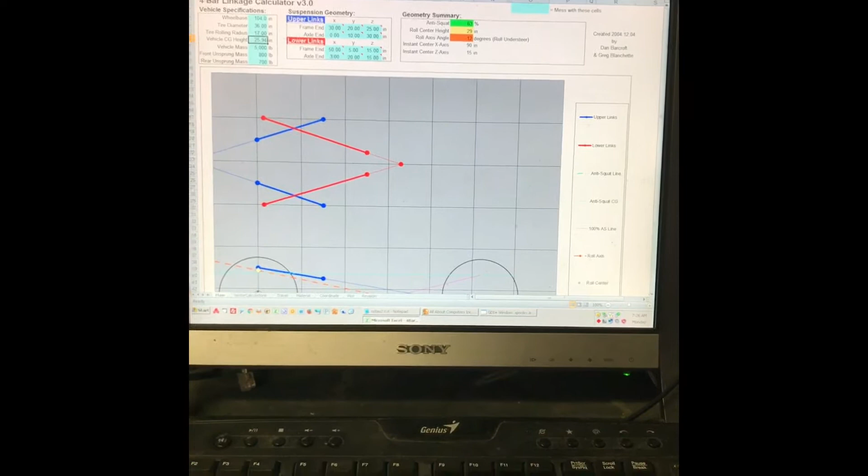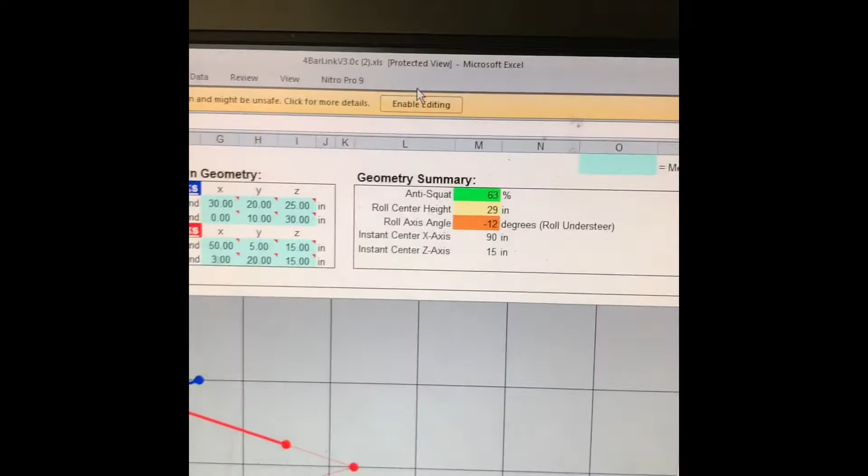First thing you want to do is open it up with at least Excel 2007 or newer. Come up here to where it says enable editing and click that. What that does is turn on the macros inside the Excel file so you can customize this stuff. So this is close to what we're doing.

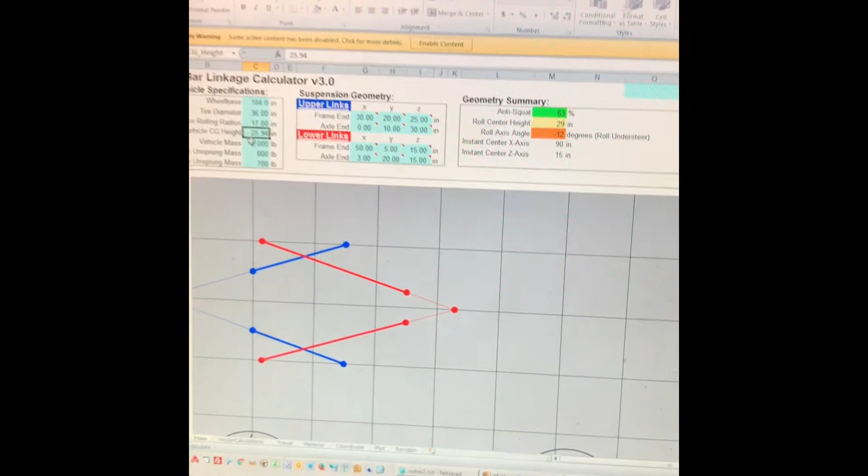The numbers are a little off, so I'm going to go through this with you. These light blue fields are the ones that are editable, that you can put your numbers in. This is going to help you out here.

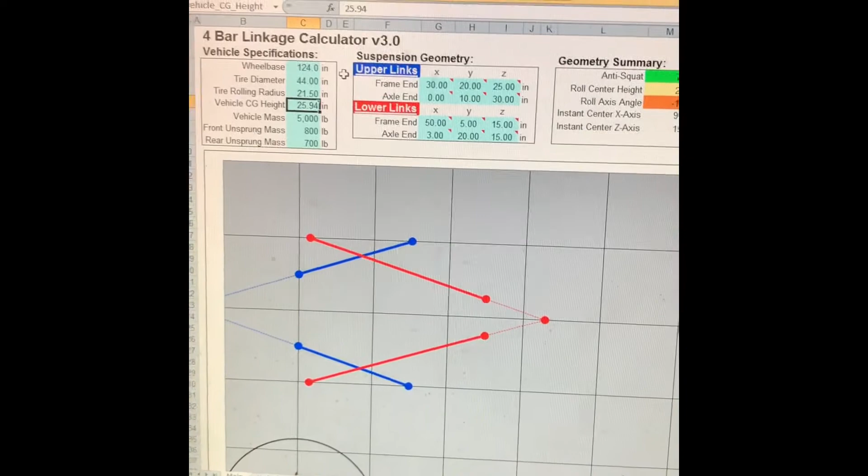So we are shooting for about 124 wheelbase. Our tires currently are about 44 inch. The rolling radius makes that about 21.5, you don't get quite 22 inches. Our center of gravity height is actually much higher than that, it's about 47 if I recall. Our mass is going to be nearly 6,000.

And we're going to incline this just a little bit to overshoot it, we're going to go 800 on that. And your unsprung mass, that's kind of like your axle weight with all the gear on it. So that's a start, this gives us an idea.

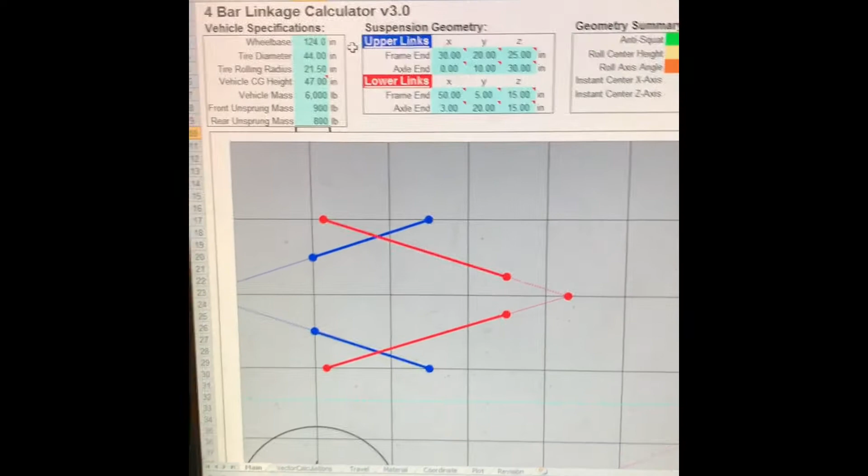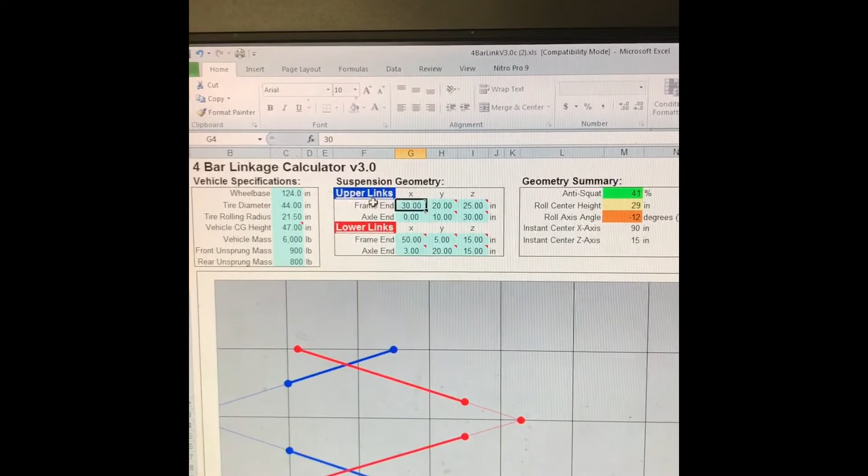So first thing we're going to do, I'm going to do this from memory here. If I remember right, what they're asking for is the frame end of your upper link, shown here in these blue bars. The first one, if you hover your mouse over it, says forward from rear axle center line.

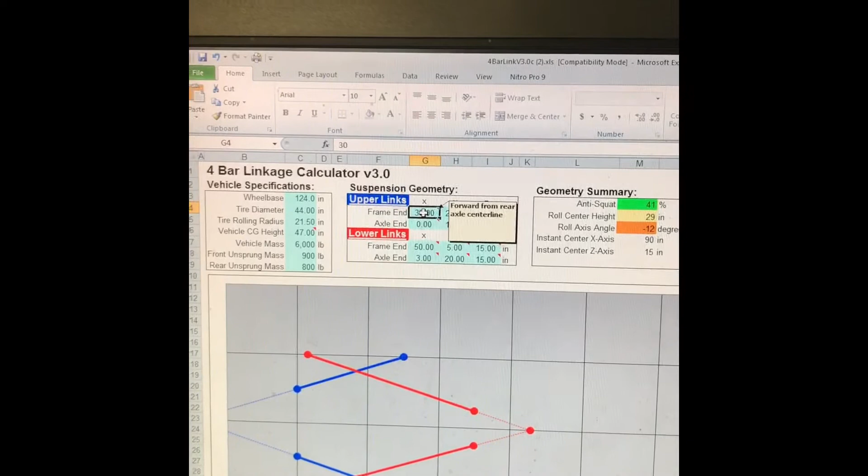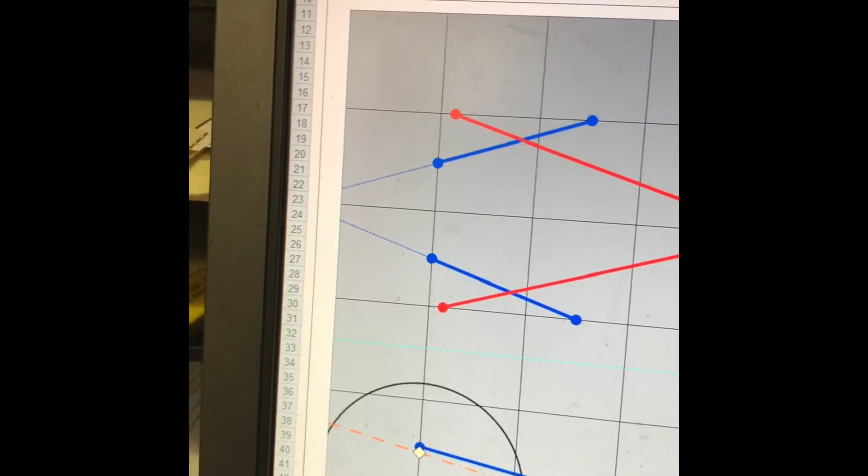So what this means is if this line here was the center of your axle - let me scroll down here, too far - you can see it kind of locates things for you virtually here. So that's showing 0 to the center of the axle. And your overall length, you would think would be the total length of your bar, but it's actually where it ends up straight on from the axle center line.

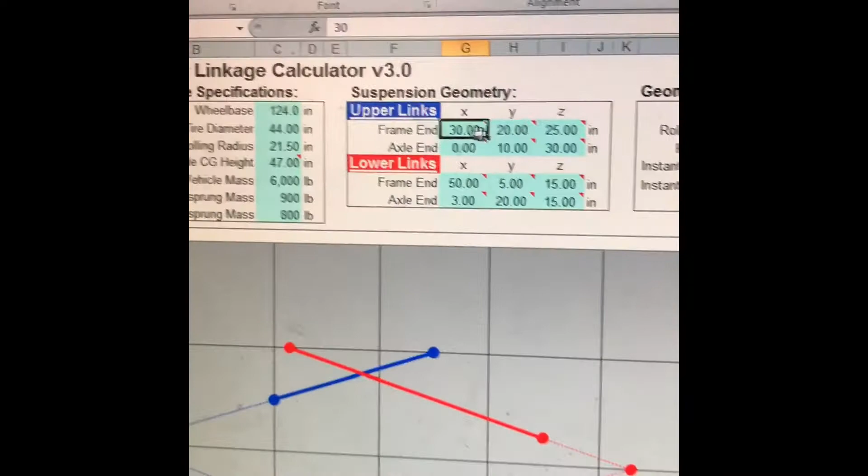So come up to the top here, where it says frame end, forward from rear axle center line. If I remember right, I'm like 54.5 is where we'll start. I actually have a picture of our actual numbers, so I can put those in. This is an old copy.

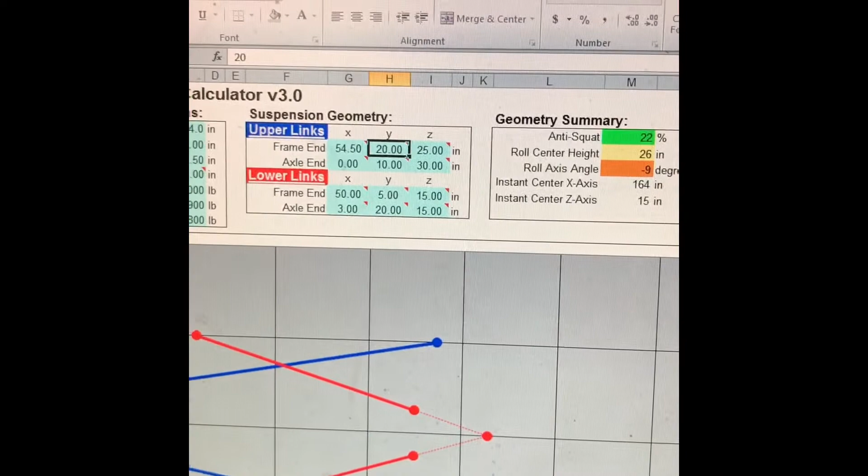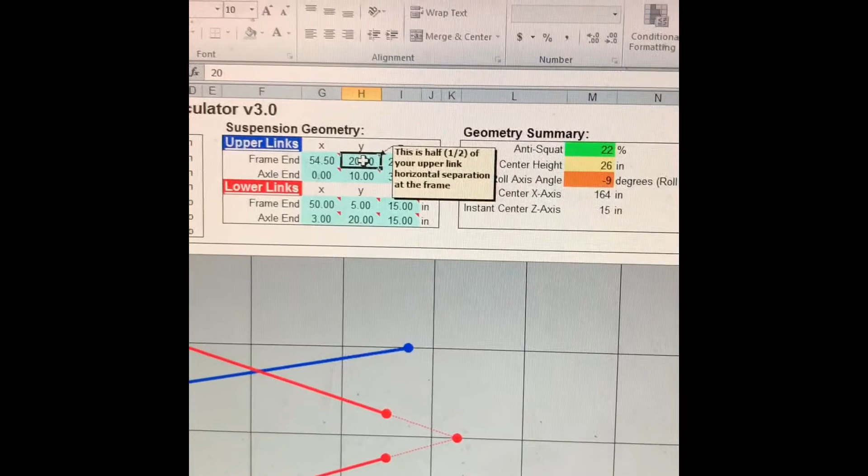Here it's going to ask for, I believe this is our separation, half of your upper link horizontal separation at the frame. So that's talking about these numbers here. What you're going to do is measure this complete width, divide it by 2, and that'll give you your deal here, that's half of your upper, obviously. I believe we're like 54.5 or something like that. We're going to just put some virtual numbers in here to try it out, just to give you guys an idea on how this functions.

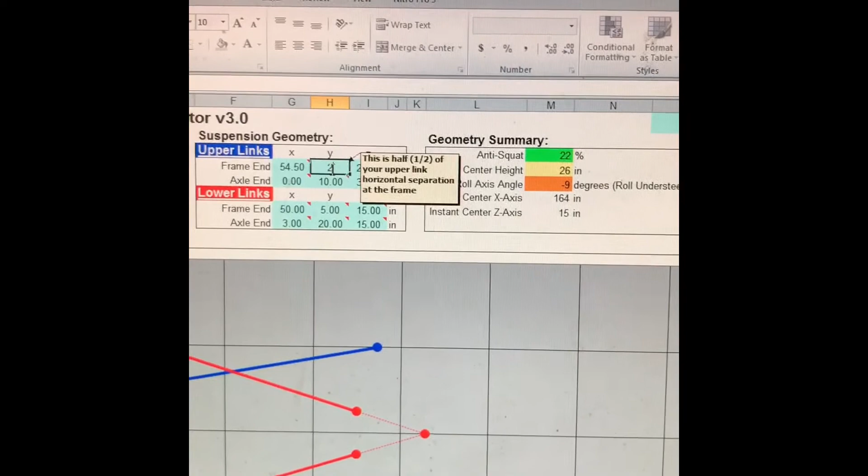So let me think here. 54.5, that was 25.25, if I remember right, is where - whoa! There we go, had an extra dot in there.

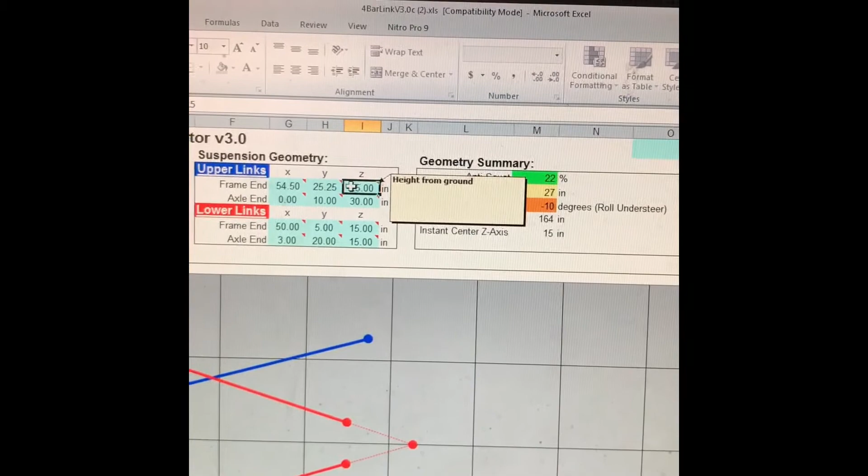Height from ground, we were at 33 inch at full bump. We're going to build this at full bump first, and then I'll add the inch in to the height from ground on the frame end on these values here.

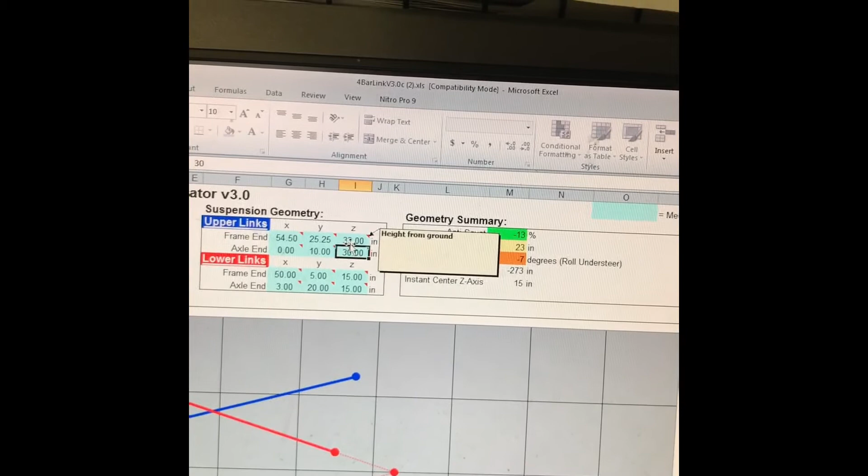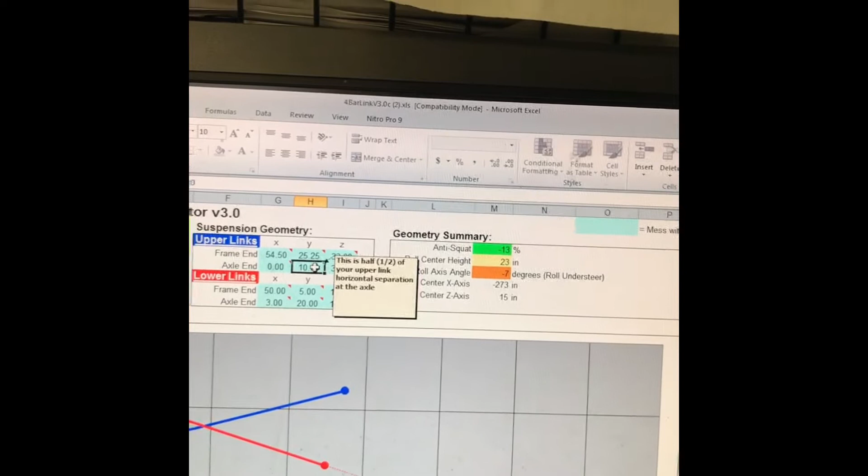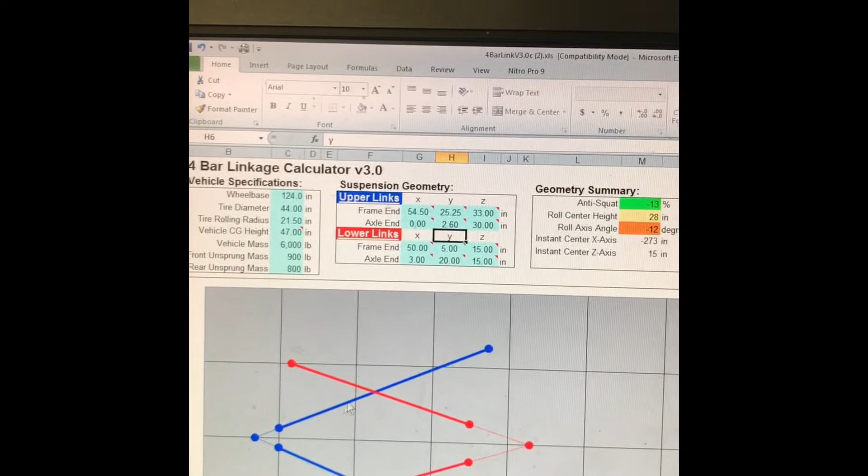So next, again, it's center, so don't worry about this. This is our upper horizontal separation at the axle. Ours is 5 1/4 - or no, I'm sorry, it's 5 1/2. So it's, I remember, 2.6 is what this number value is. So this gives us close here. This gets us a separation of more than 50 degrees, if I recall.

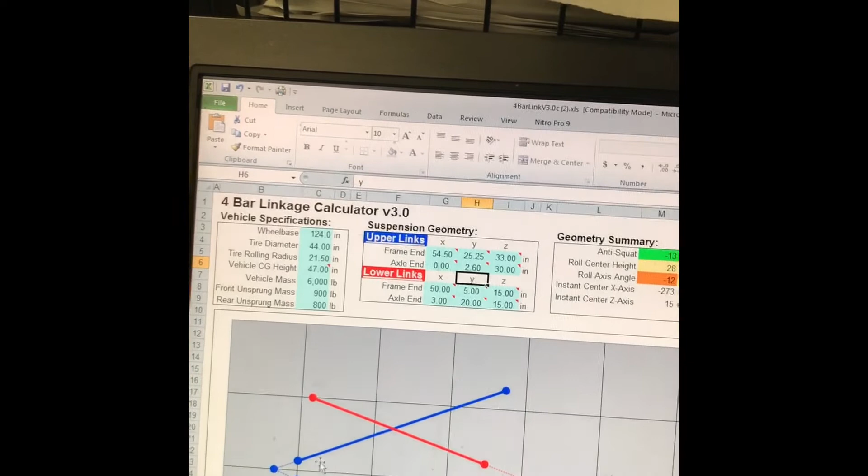How we figured that out - you want at least 45 degree separation here at your top. You want to make sure that these bars, that's what centers your axle and keeps the side motion, so you don't have any side motion to have this axle go back and forth. So that's a start, okay, so we got that pretty close there.

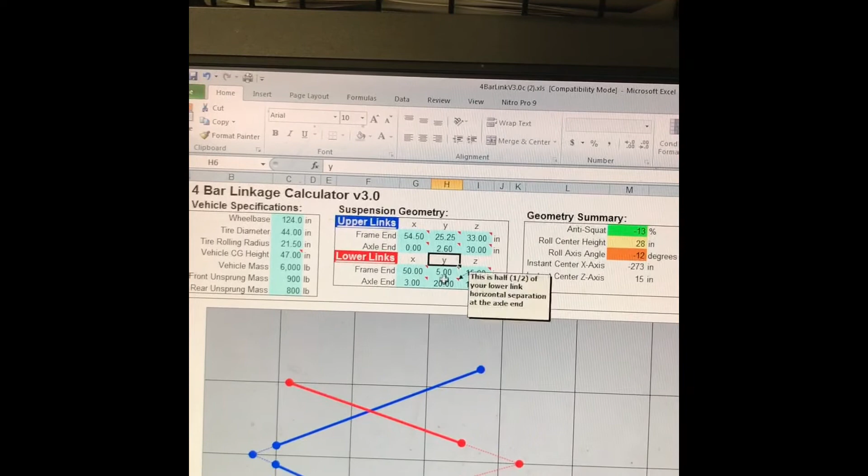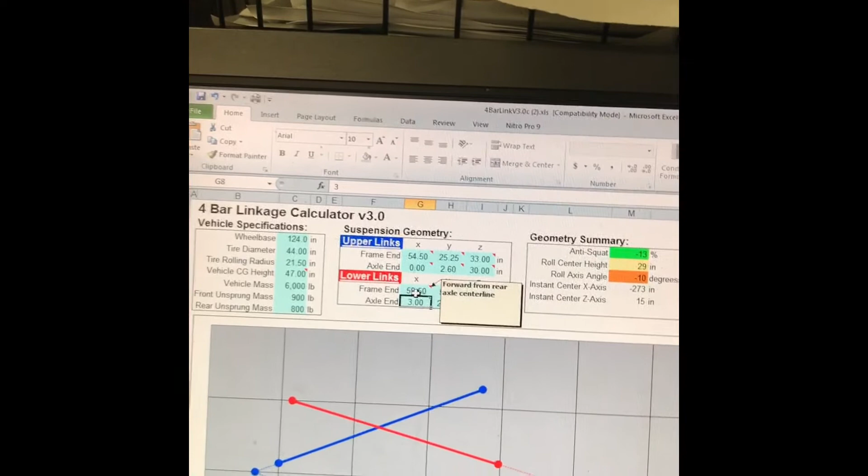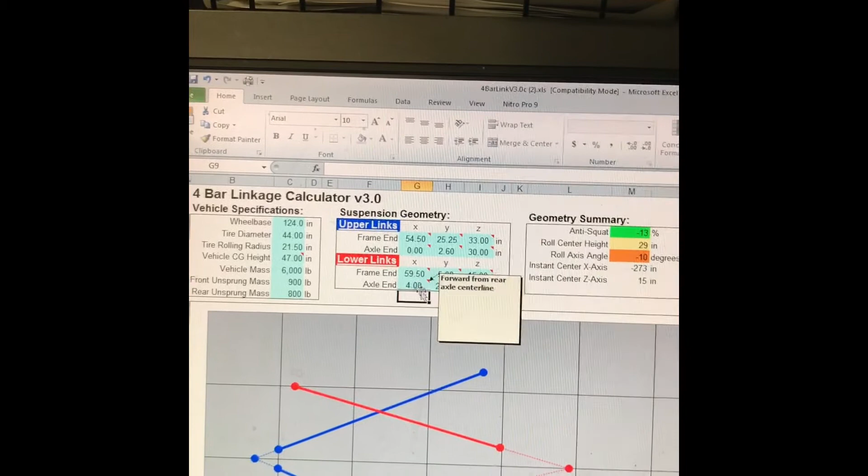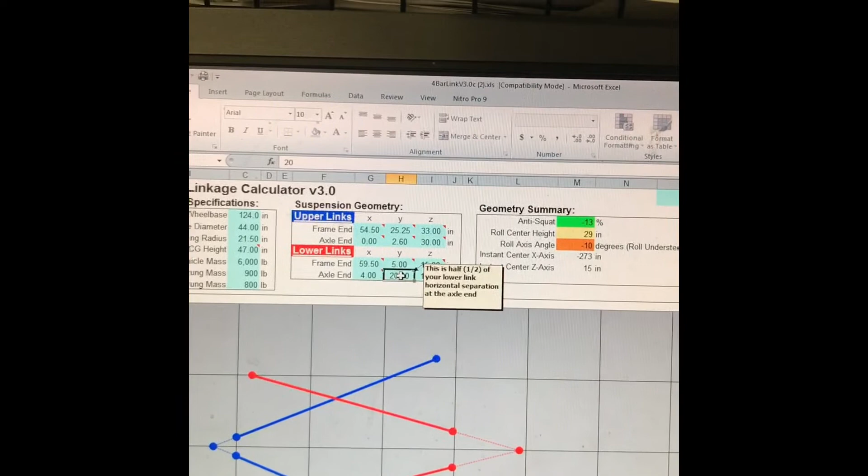So I'm just pretty much rebuilding this right from scratch, and you could do this from raw numbers again. So here's your half of your lower link separation horizontal at the axle end. So we have a total of 48, there should be about 24 if I recall.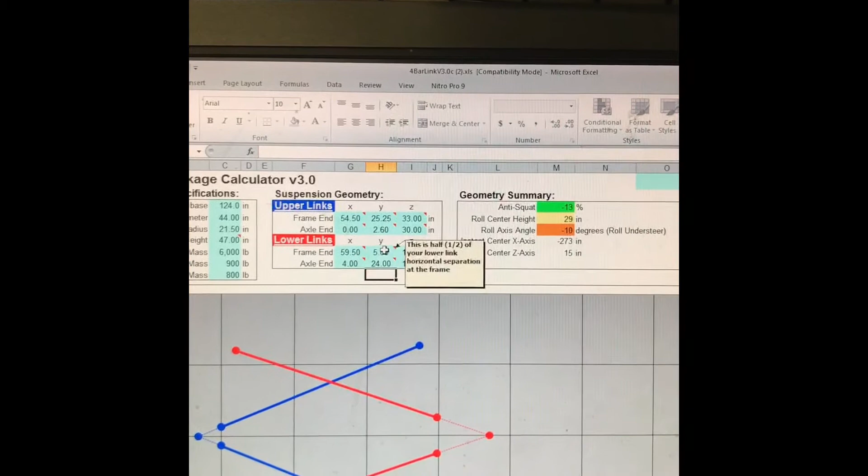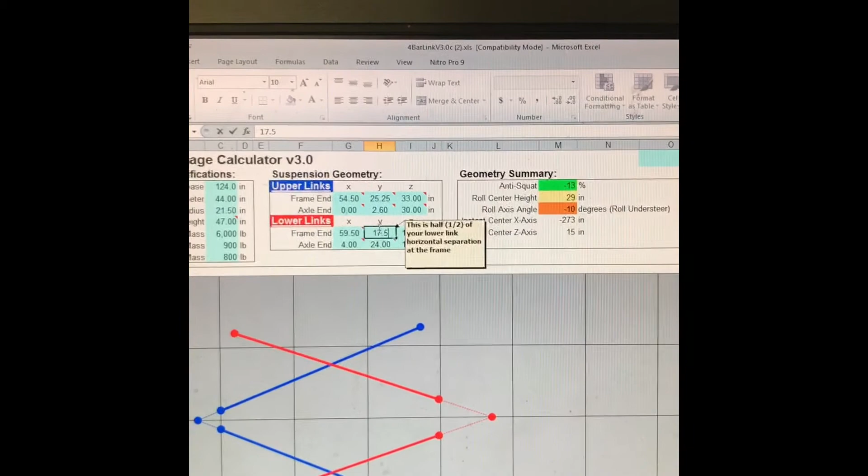Okay, and then down here, this is way off. This should be at the frame. We have that at about 34, so half of that is what? We'll go 17.5 just to be close. That's too much, it's going to be more like about 15. That looks realistic about what we have set up now.

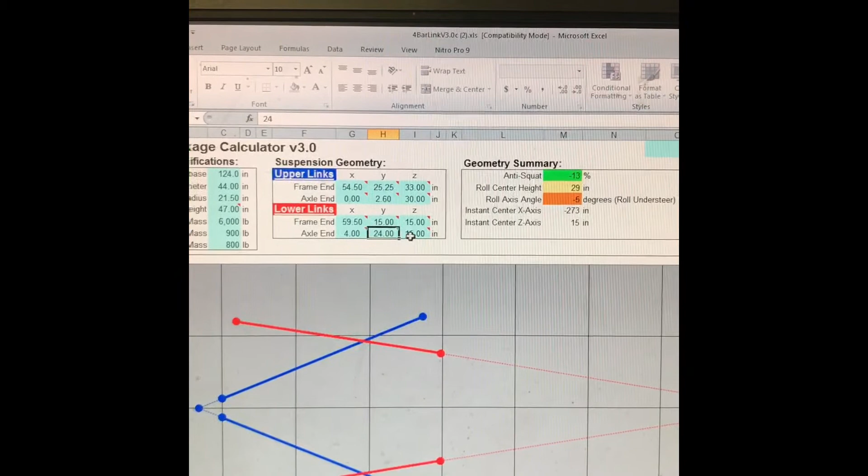So here we got some other numbers. This is height from ground on the frame end, which is obviously not 15 inches.

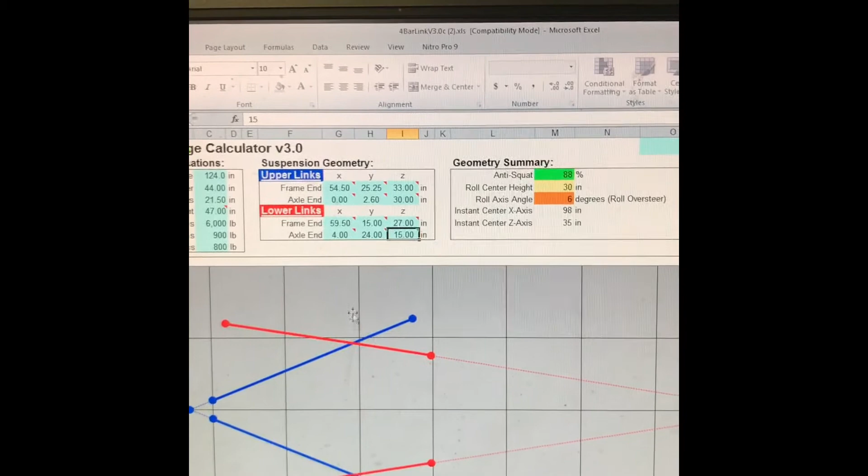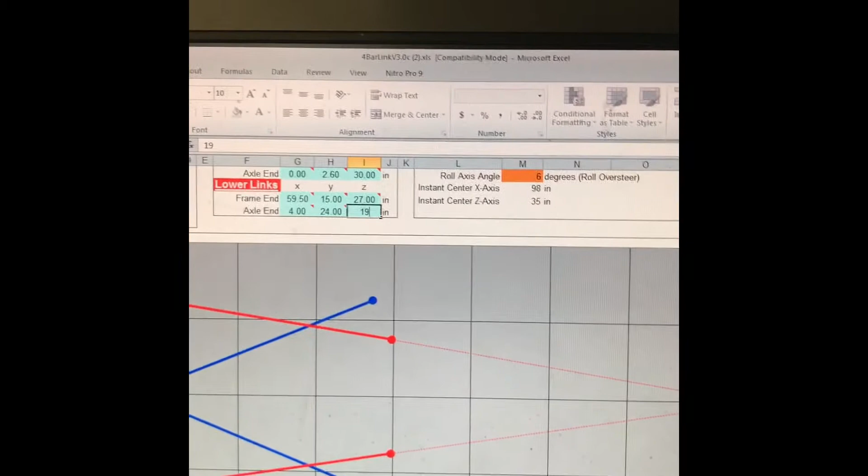Lower links are from the ground on the frame end were 27 inches. And on the axle end, they are, if I remember right, gosh, this one's a tough one, guys. Yeah, see how low that is? That is not correct. This should be up higher. If I remember right, it's 19. Pretty sure it's 19. See, that looks about right where our setup is now. That's really close to our double triangulated 4-link there.

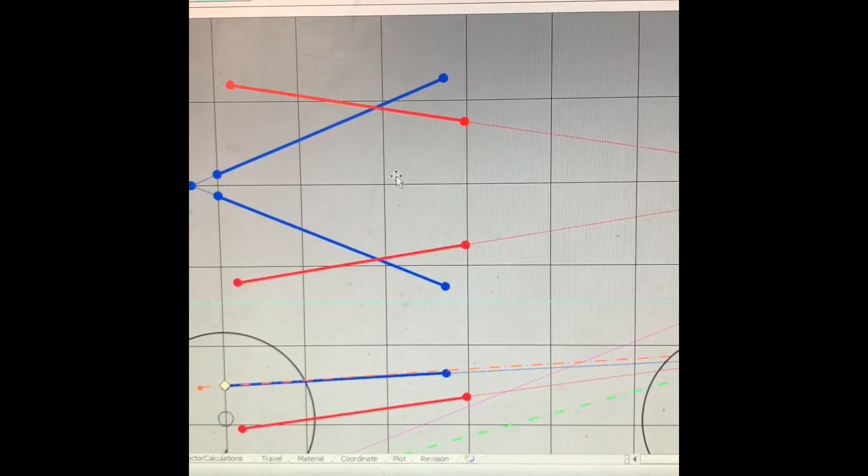Let me see if I have all of the numbers inputted here. Give me just a sec. Okay, now if you go down here to where it says travel, you'll get this tab down here. We're on the main tab, and now we go 2 over to travel. There's some stuff in here that you can do as well, and you would think 10 inches is what you'd want to see, but it's actually -6 will give you a 6-inch ride height.

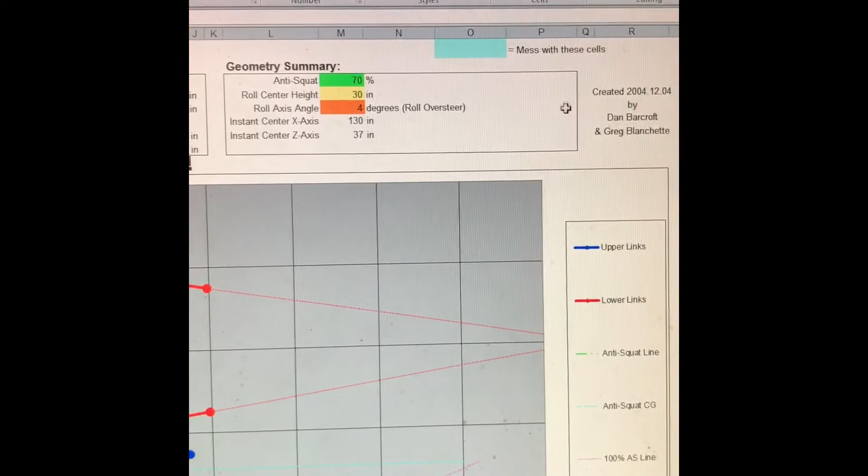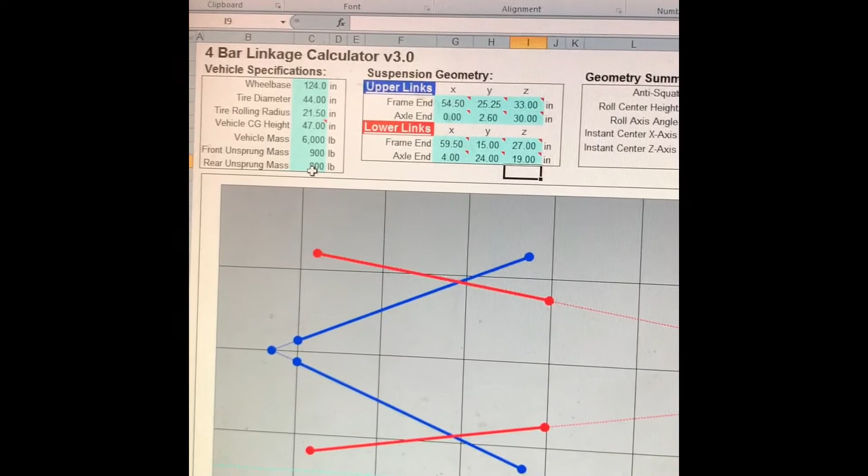And now if we go back to main, this should give us some different numbers. For some reason these aren't coming up. I might have a different version of this. I need to grab the other one, but this gives you a rough idea, guys. Play with these light blue fields, and if you're unsure on something like this vehicle center of gravity height, typically, if you are an iron block, it's your highest bolt on your transmission bell housing.

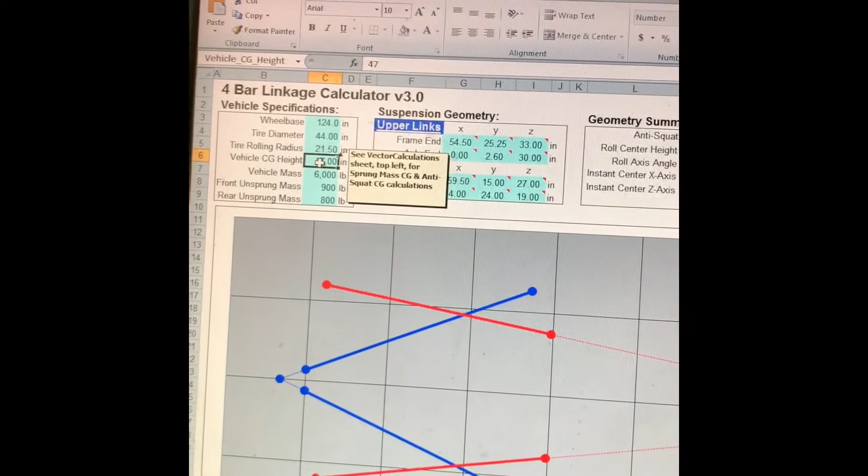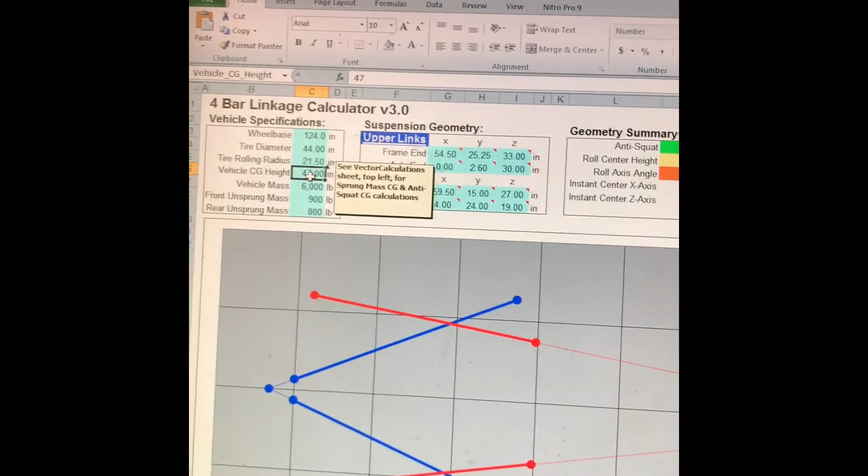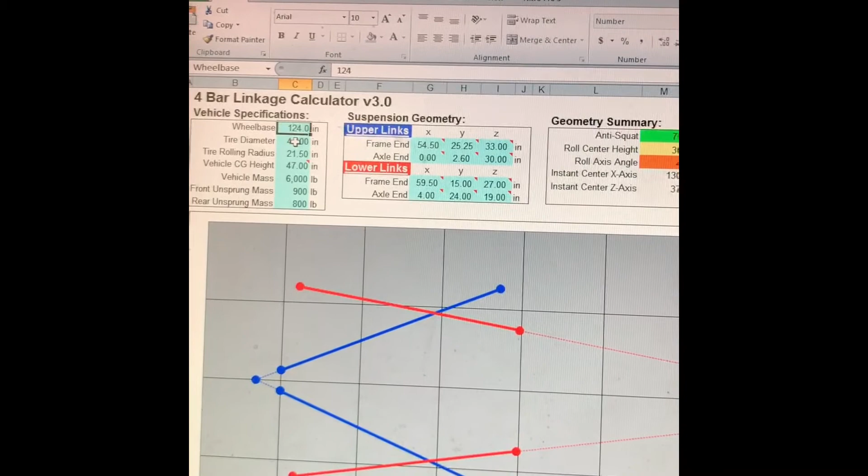If you're an aluminum guy that has a really light motor, an LS or something like that, they say the center of gravity height is about halfway up the transmission on the bell housing. So a couple holes down, you gain 2 or 3 inches because of how light it is. Mass, obviously, that's the total weight of the vehicle. Your wheelbase measured, hub to hub. We wanted to go a little bit smaller, but this rig is going to be doing multiple things: hill climbs, rock bouncing, mud bogs, go out to the sand and play, climb on the rocks. We've got multiple transmissions, all sorts of stuff for it.

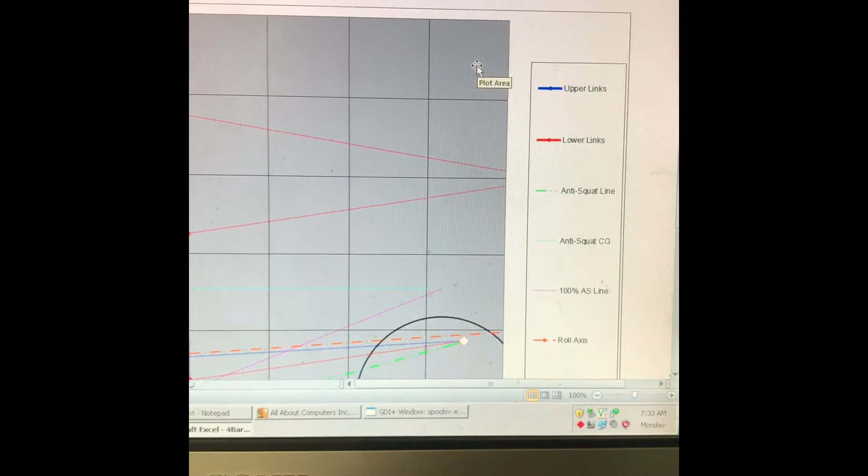So I think we're close on these numbers. Everything looks pretty dang close. That's about what our deal looks like. And for some reason, this version doesn't have the travel. So let me get back to you. We'll post this up here, and make sure that when you're done, what I like to do is keep the original. So make sure you go to Save As, and throw this somewhere where you get a second copy, like step 1, step 2, step 3, whatever works for you. That way you can go back and look at your changes, and get real familiarized with the characteristics of your suspension.

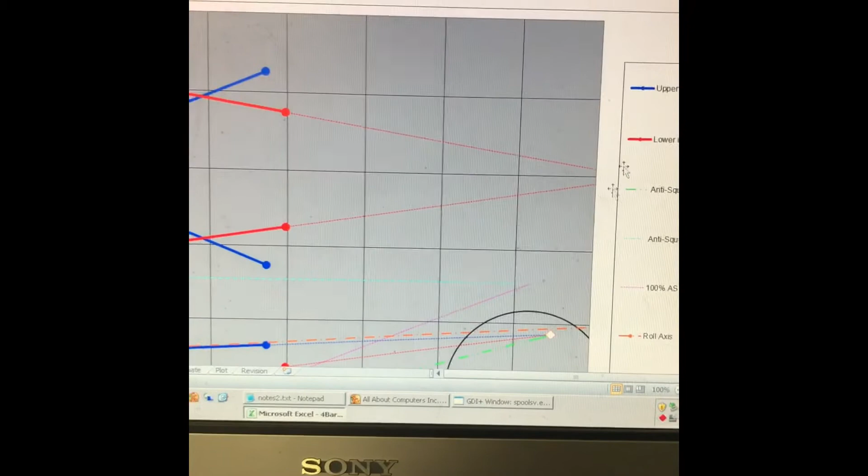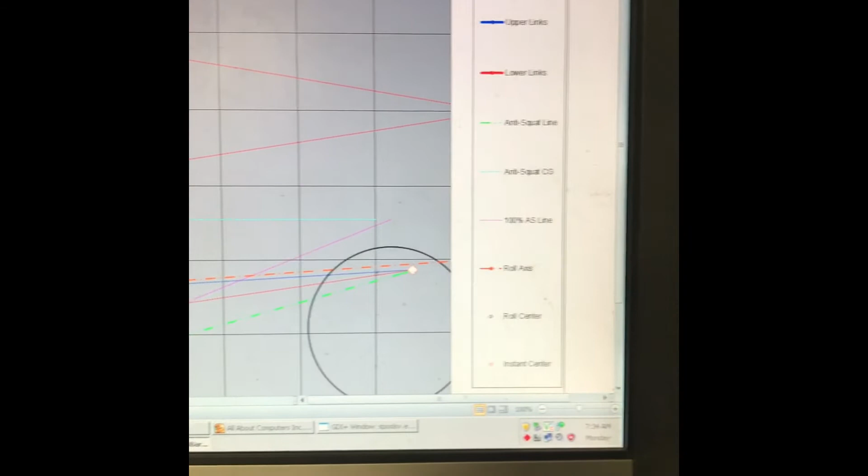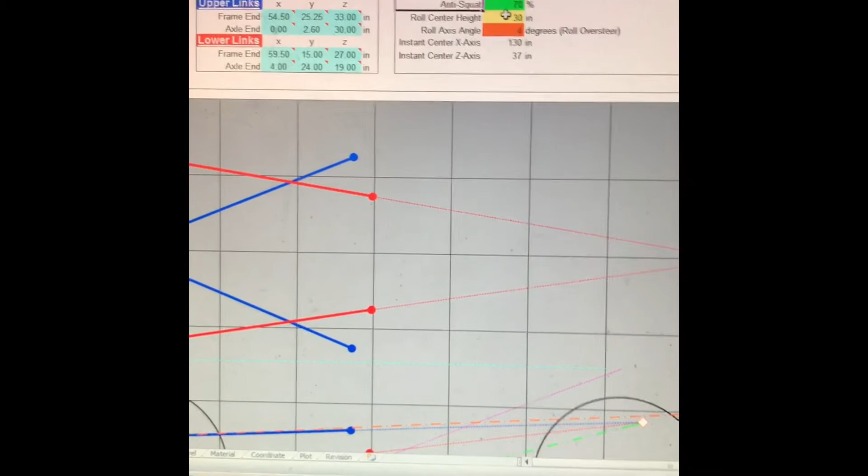Again, the biggest thing that you really want to do is make sure your uppers, that's signified in this blue bar, it goes to the frame end. Make sure your frame end's got some adjustability, because this is what's going to give you a good anti-dive number or anti-squat, depending on what you're working on. This calculator, from what I've read and from the videos on rock rods on YouTube, they state that anti-dive is for the front and anti-squat is for the rear. So this value is actually the same for the front. And in the front, obviously, you want a lot of anti-dive, because you don't want that nose to dive down when you step on the pedal.

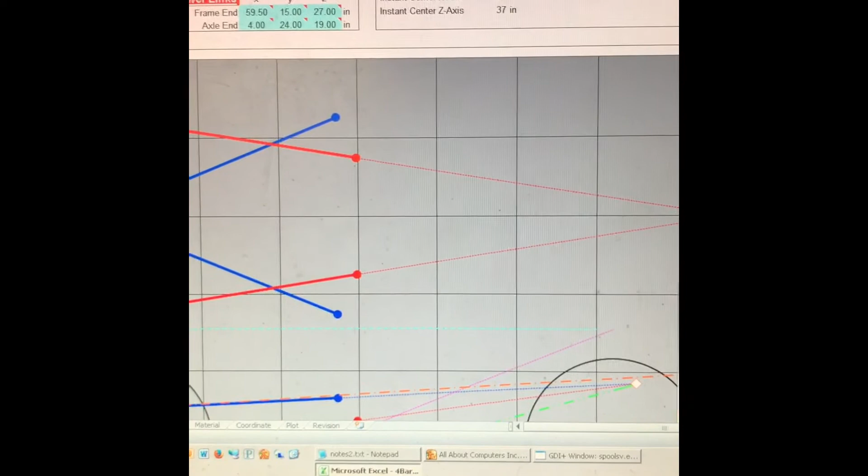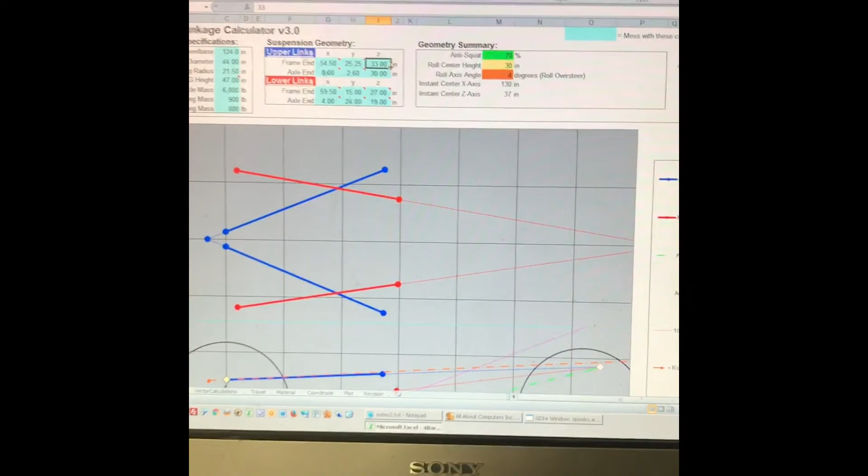So the optimal range, I believe, is between 90 and 110. 100% is about right in the middle, from what I understand. So we've actually been able to adjust ours. If I go lower here, you'll actually see that value increase. We've got 4-link adjustments on the upper frame side. So what I'm going to do is lower this. And instantly went from 75 to 91% anti-squat. So this is going to help you guys understand a little better what you're doing here.

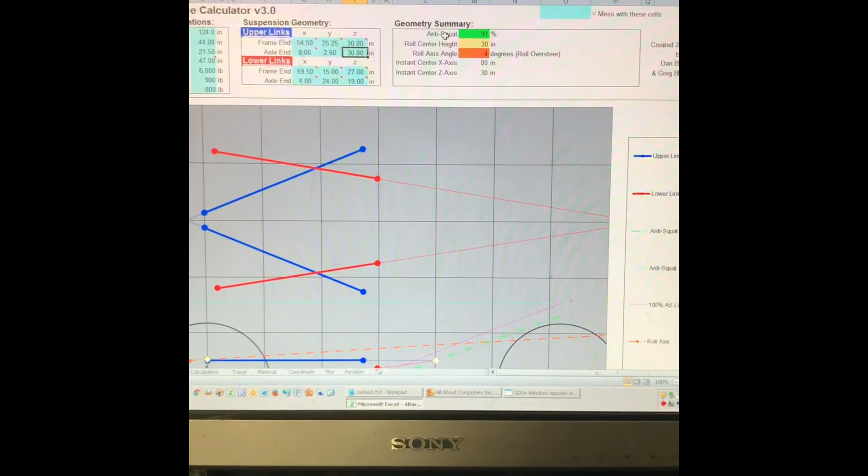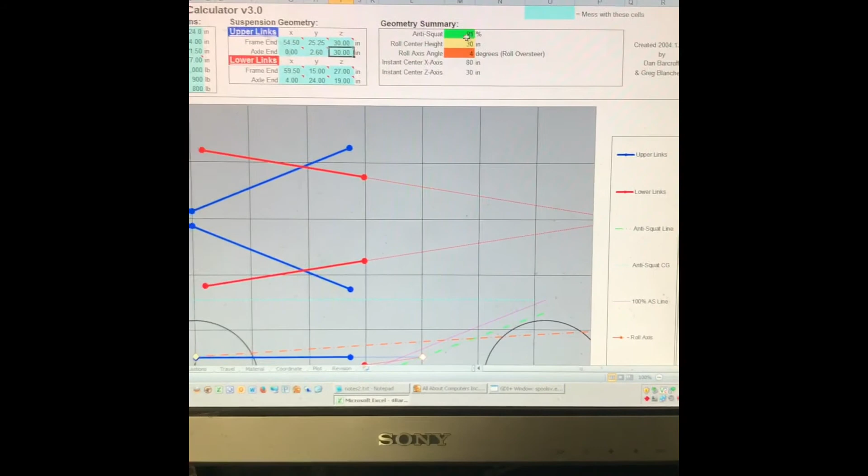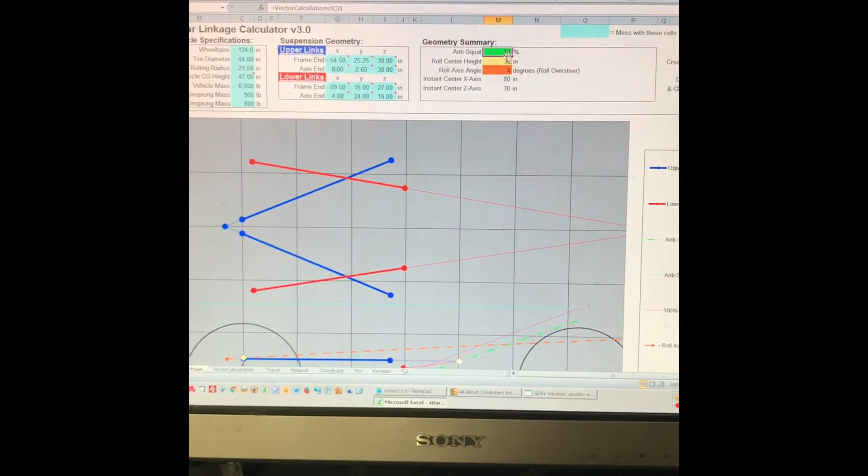Anti-squat is actually for the rear, but what you want is to be able to adjust it from that number. You'll have about 3 inches of adjustment in your upper. So you want to go between 90 and 110 is what I am shooting for. That's what I would suggest for the front. The rear, if you're stepping on the gas and your ass is dropping, you need more anti-squat, from what I understand. Again, I am a little new at this, but I've spent many hours looking and researching this form.

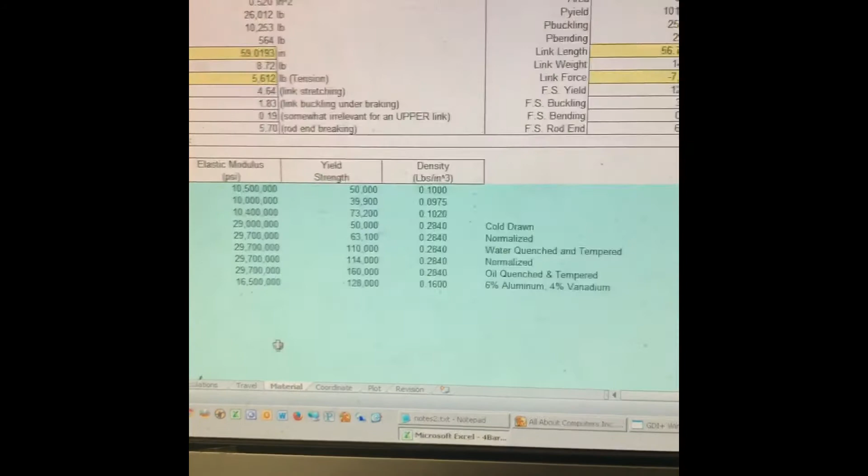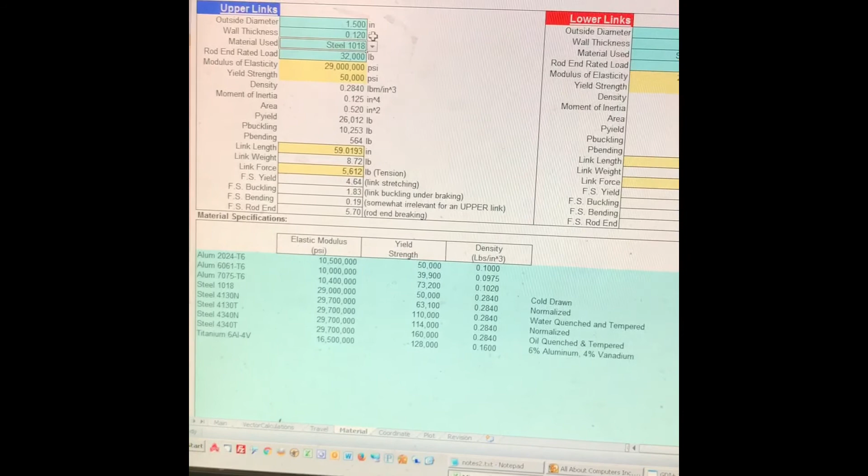There's so many things down here that you can get lost in. You know, the plot, the coordinate material. This will show you all your actual tensions and the strengths of your links. You can choose. These are all drop-down boxes. So, boom, put your steel in. Sizing, obviously we're not going to do 120. That's going to be 250. That should be adjustable, or you can just put in 250. And the outside diameter is obviously going to be 2" in ours. So that kind of helps.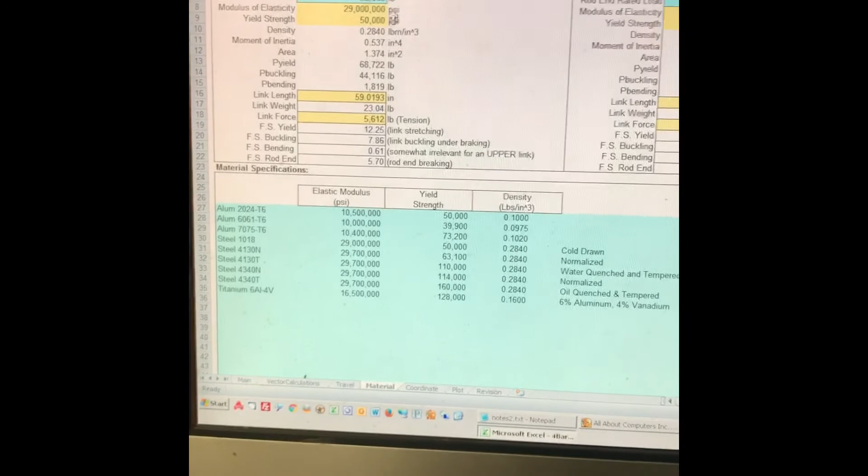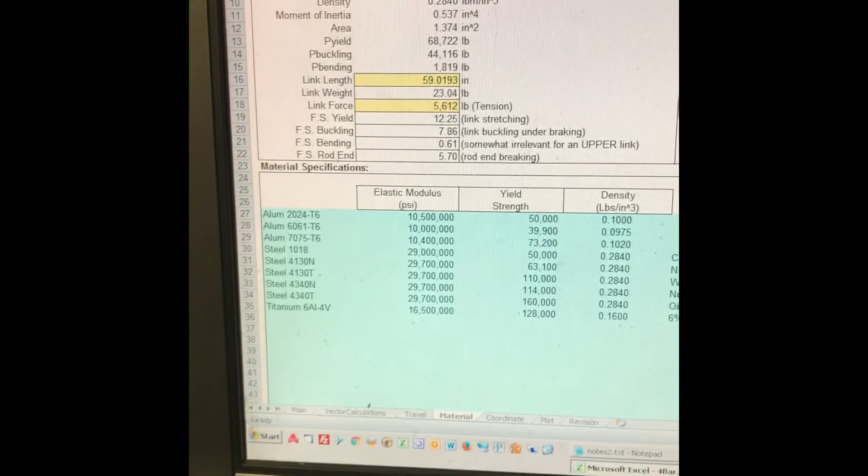But it'll give you a lot of the tensile strengths and the elastic strengths, from what I understand. I'm not real keen on that. I'm still new to that. I'm kind of a visual guy. I've been self-taught on everything, and if you're following some of our build, we're doing pretty good so far, I believe. So, again, that's it for now.